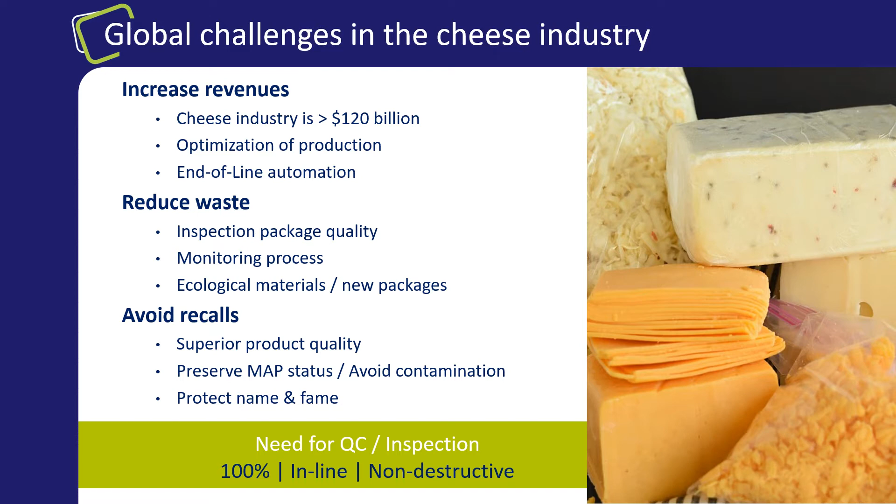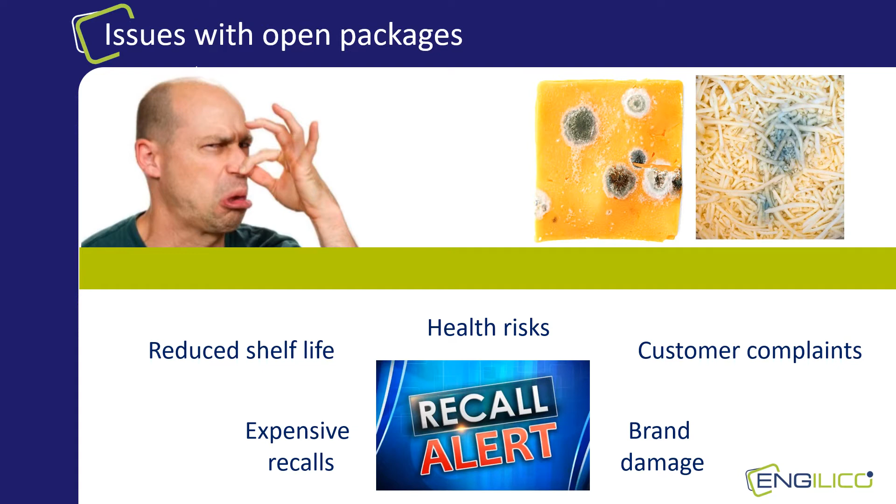When sealing flexible packages, there are different issues that can cause open or leaking packages. The first type of issue that results in open packages is residual product or material that is stuck in the sealing area. For example, as grated cheese is a greasy, sticky product, it often occurs that cheese particles are residing in the sealing area during the filling. Or in case of sliced cheese, the cheese rinds can also get stuck in the seal.

Other issues are folds, foldovers, or wrinkles in the seal that can lead to leaking packages. Also, misaligned cheese slices or trays on which the cheese is positioned can lead to seal height errors or product in seal. Above problems can be caused by the filling, positioning, or package forming process.

As there are many mechanical parts in a packaging line, there can be drift on the packaging and sealing process that can lead to above-mentioned problems. Also, dirty sealing bars or Teflons can be the cause of badly sealed packages. Or, if the overall process is packaging too fast, there might be issues as well.

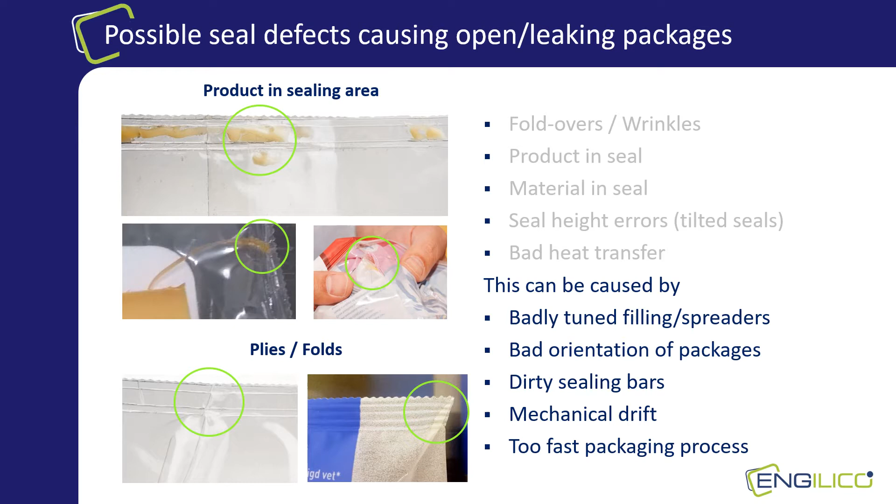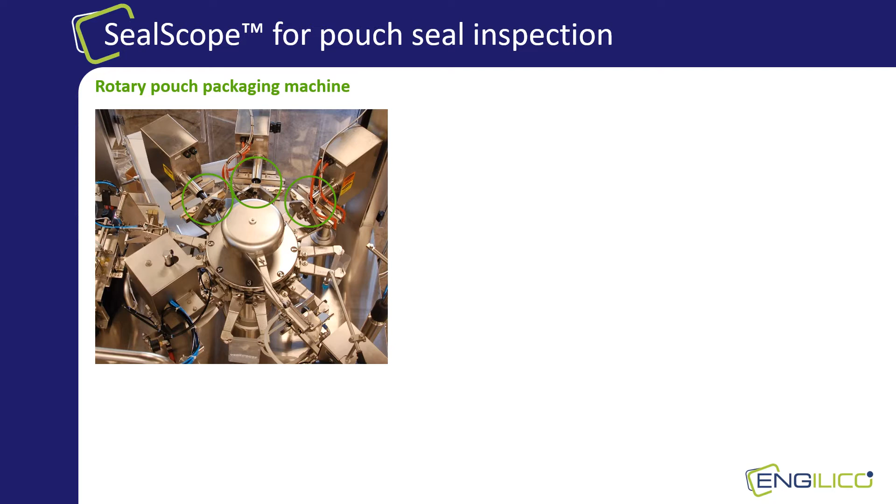The SealScope technology is explained on a rotary pouch machine, but is basically the same for other types of machines. The SealScope system consists of one or more sensors that are attached to the sealing bars of the packaging machine and a controller unit with the SealScope software. Of course, the sensors are specifically designed for food applications and are IP68 washdown proof.

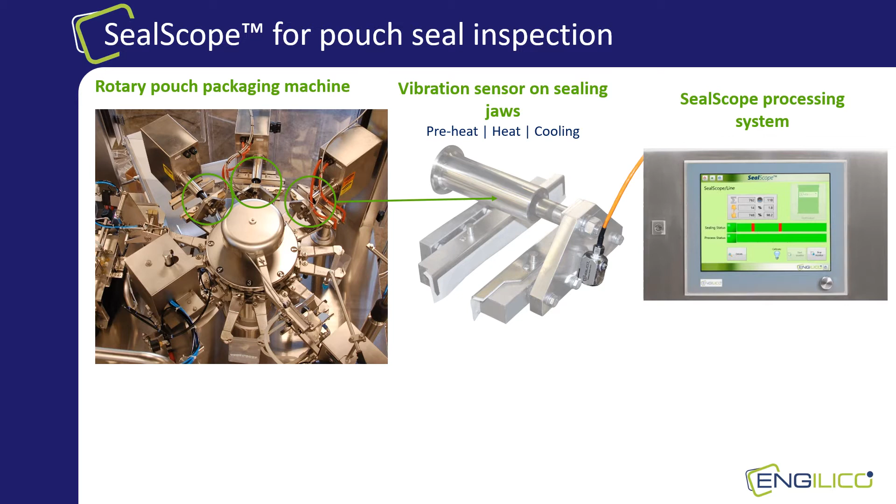The controller processes the sensor signals, but also receives and sends signals from and to the packaging machine or peripherals such as an ejecting mechanism. As the sensors are integrated within the machine, every individual package is inspected in the packaging line in a non-destructive way. This is why the system is called an inline 100% seal inspection system. Also, because the system is integrated in the machine, it will not require any additional space nor any change to your existing packaging line layout.

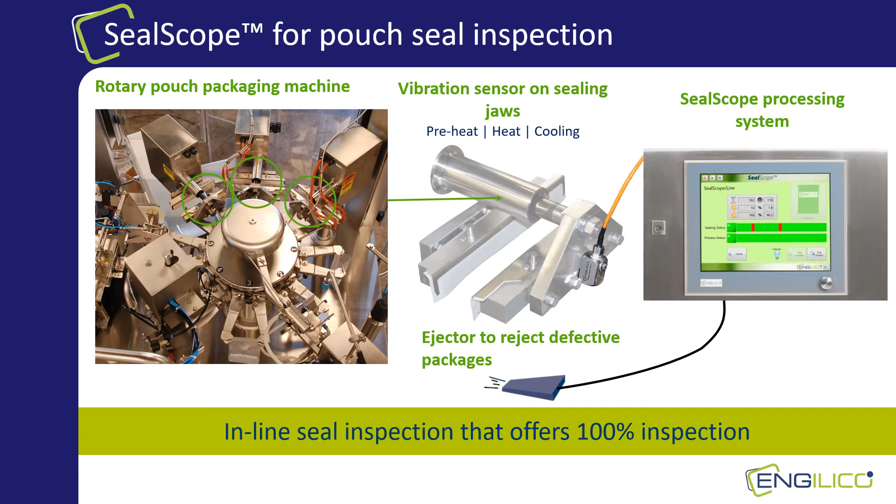Every measurement is compared to a reference profile of a good seal, a so-called fingerprint. The reference models are automatically updated at the start of every run using correct seal profiles, a process that we call baselining. SealScope can use different reference models to accommodate changes in thickness, material, weight, or size, as the product on the line also can vary. If a sealing measurement differs too much from user-defined boundaries around the reference profile, a signal can be sent to an ejector to exclude the bad package.

As every seal is measured, it is also possible to monitor the variance on the sealing process in time. Alarms can be issued when exceeding user-defined thresholds, and cleaning or even maintenance can then be scheduled.

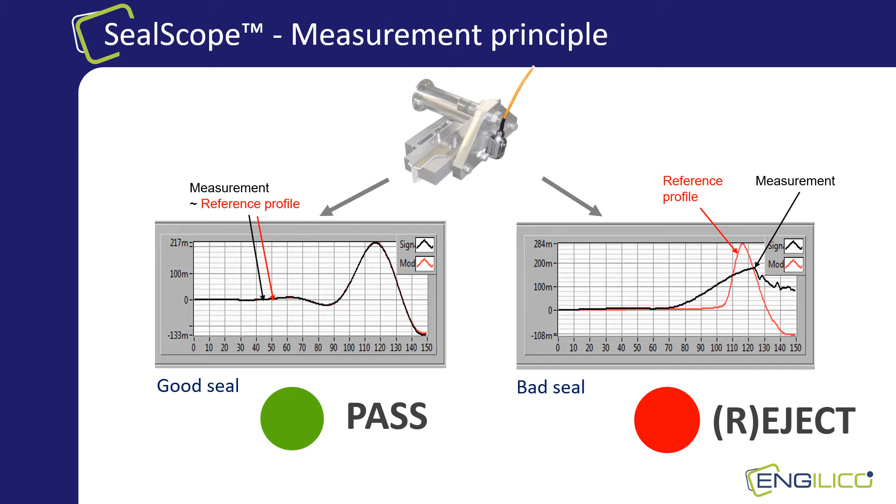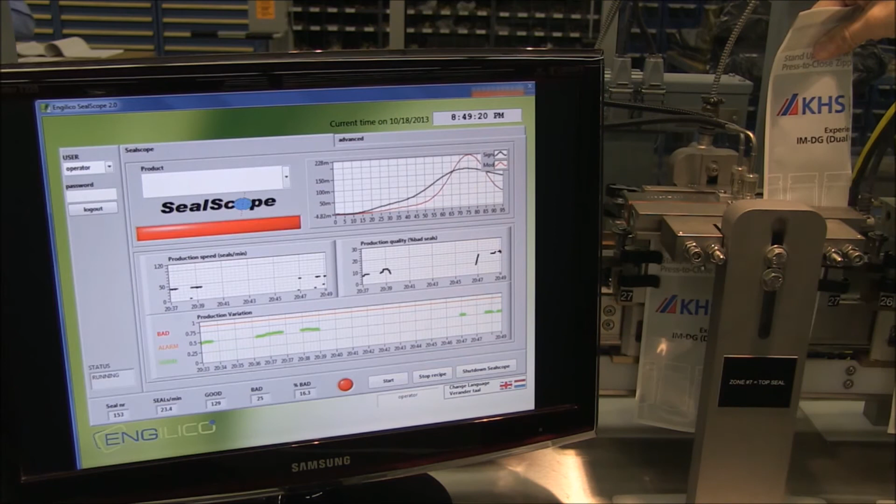So here is an example of how SealScope works on a pouch packaging machine. Pieces of packaging material with different sizes are inserted during the sealing of pouches to simulate wrinkles or product in seal. One can clearly see the differences in measured signal and how SealScope reports the error. It also demonstrates that SealScope is very sensitive and can pick up small contaminations or wrinkles.

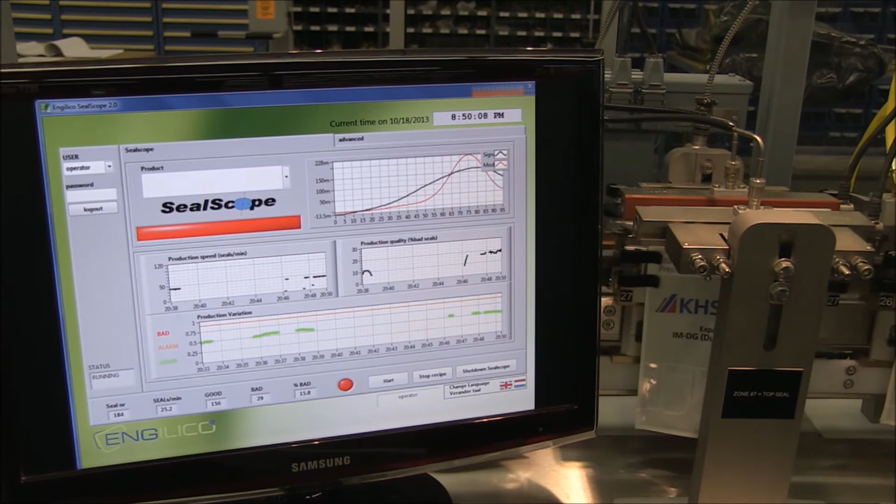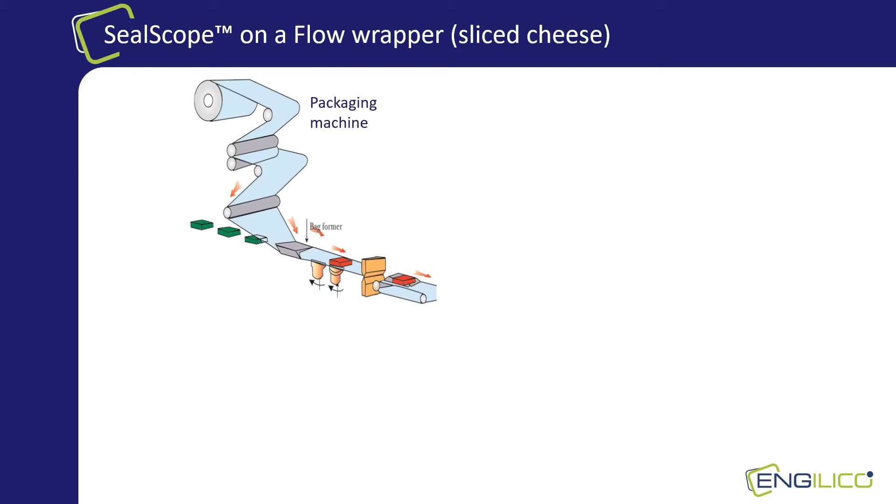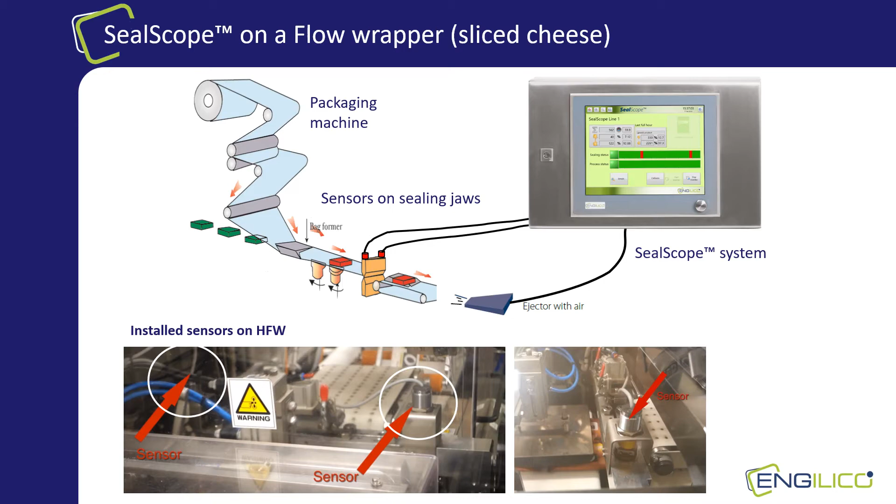The second example is an integration on a horizontal flow wrapping machine to package sliced cheese. The distance sensors are connected with brackets to the sealing bars. In the next movie, the operation is explained. First, you see how the packages are sealed and separated. The arrows indicate where the sensors are located.

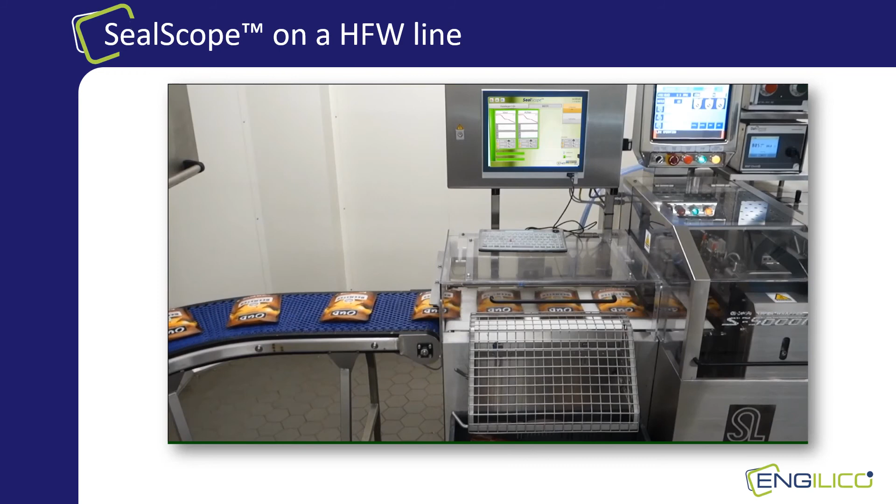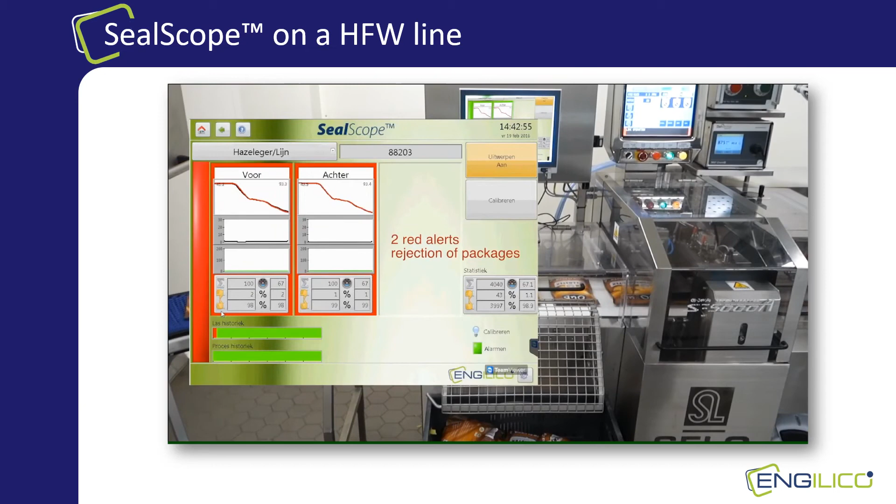For defective packages, red alerts are shown in the SealScope software. The packages with issues are blown out by the ejector. These packages can be manually verified to identify the issue, which can provide important information to fine-tune the packaging process. Another advantage of the inline detection is that the product can be repackaged immediately.

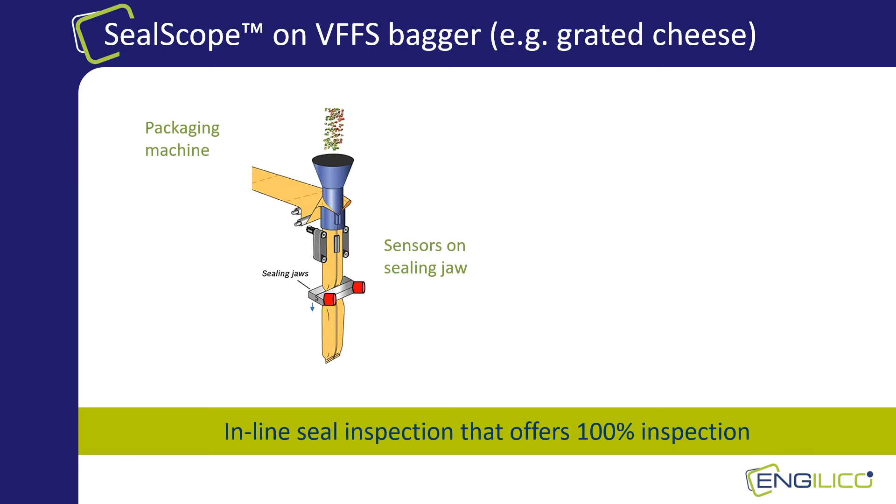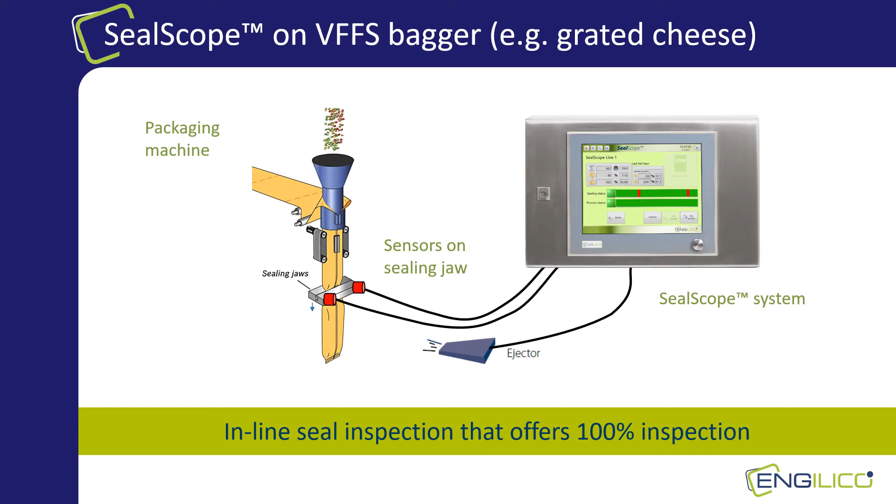The last example illustrates the operation on a vertical form-fill-seal bagger, often used for packaging grated cheese. Distance or vibration sensors are mounted on the sealing bars to detect product in seal or wrinkles. In the next demonstration movie on a VFFS machine, it again shows the basic operation of SealScope for 100% inline inspection.

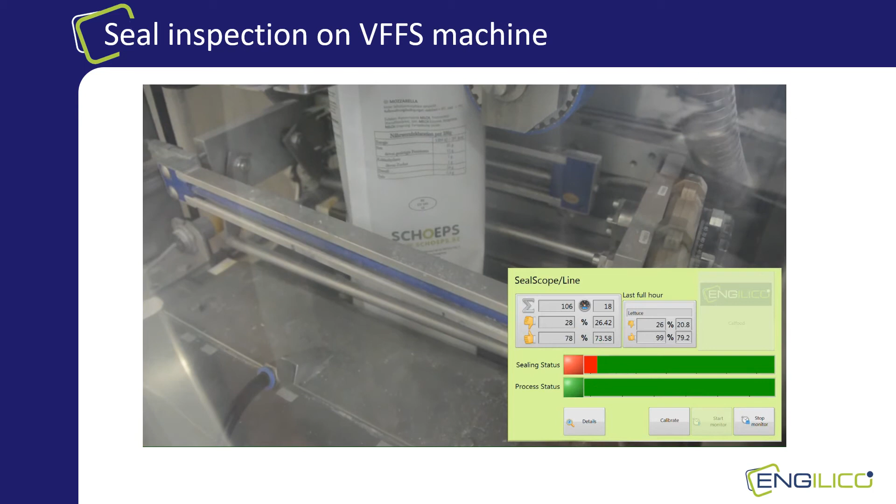In this demonstration, grated cheese is packaged on a VFFS machine. You can see again the sensors, and SealScope detects issues with product in seal or faults that lead to micro leaks.

The integration of the sensors is relatively simple. Vibration sensors are mounted on the sealing jaws using a standard M6 bolt. The distance sensors and targets are mounted using a mechanical bracket that is interfaced to the sealing bars or holders. SealScope operates both with single and multiple sealing packaging machines such as duplex, triplex or quadruplex sealing stations.

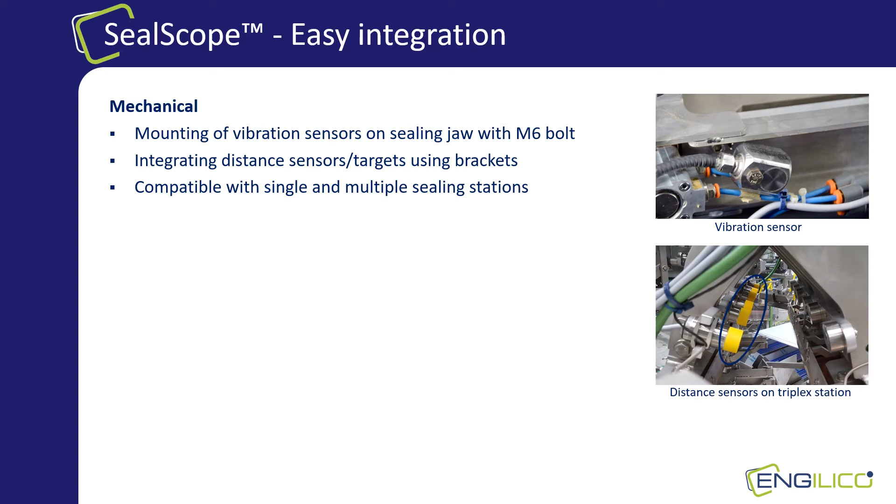The base controller unit with touchscreen operation handles PLC-type digital 24-volt signals from and to the packaging machine and peripherals. The input signals consist of triggers from the machine cycle indexer or signals that indicate the opening and closing of the sealing bars. The output signals consist of triggers sent to an ejector system to remove the faulty packages.

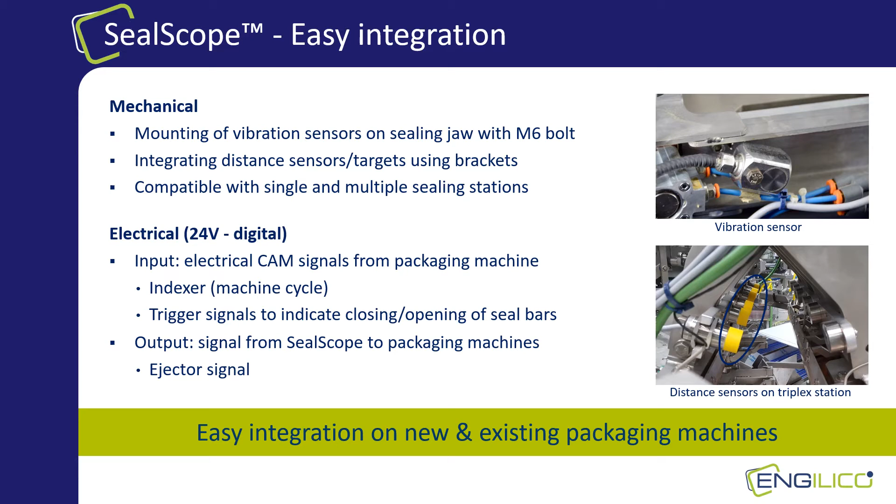Typically, the installation of a SealScope system, including mechanical and electrical wiring, testing and fine-tuning of all parameter settings, is limited to a few days. As the integration is relatively straightforward, SealScope is compatible with almost all packaging machines for flexible packages. Some of the renowned brands on which we have already successfully integrated are presented in this slide.

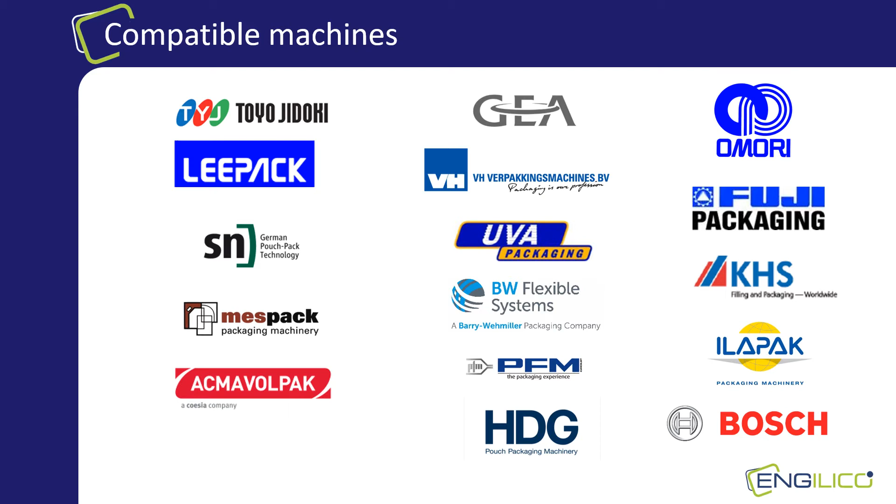So let's now take a closer look at the operator software. The operator software runs on the controller unit that is embedded in an industrial cabinet equipped with a touchscreen. The main screen is very operator friendly and provides basic information on individual seals and the sealing process status.

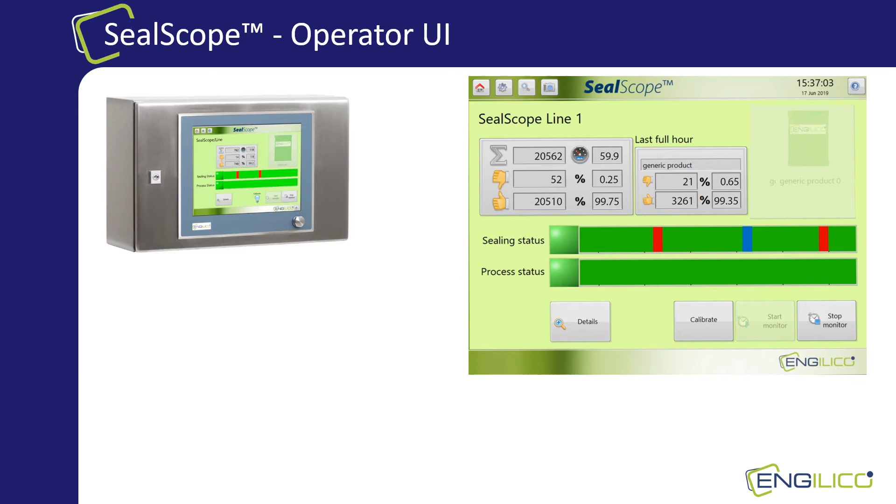In the sealing status, the operator can see the quality of each individual seal. A defective seal is indicated with a red bar. Also, if there is an empty package due to a wrong filling, this is indicated but with a blue bar. In the process status, one can see the variation of the process over time. Information is available since the start of the production run and on the last hour. The operator can also launch a calibration phase to set the reference profile after a standstill or after cleaning.

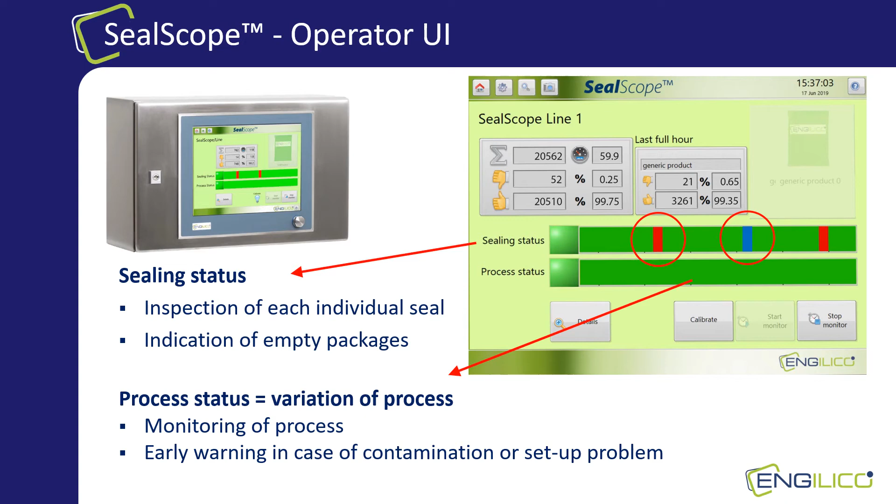Behind the basic functional operator UI, there are more advanced UI screens to analyze detailed results. In the advanced UI screens, all measurement results and signals from the different sensors are displayed to provide more information on the sealing process. All seal bar closing information, such as lift, tilt, and optionally roll, is calculated and is presented in a visual way to obtain more information on the seal bar behavior.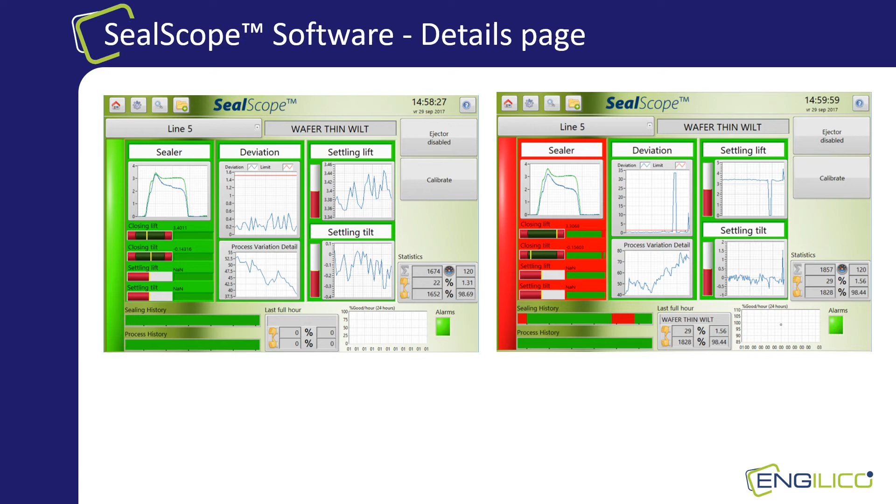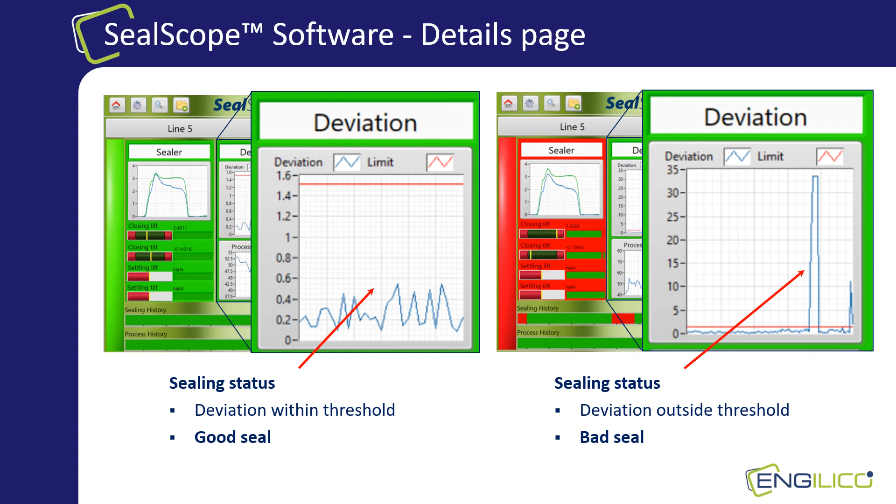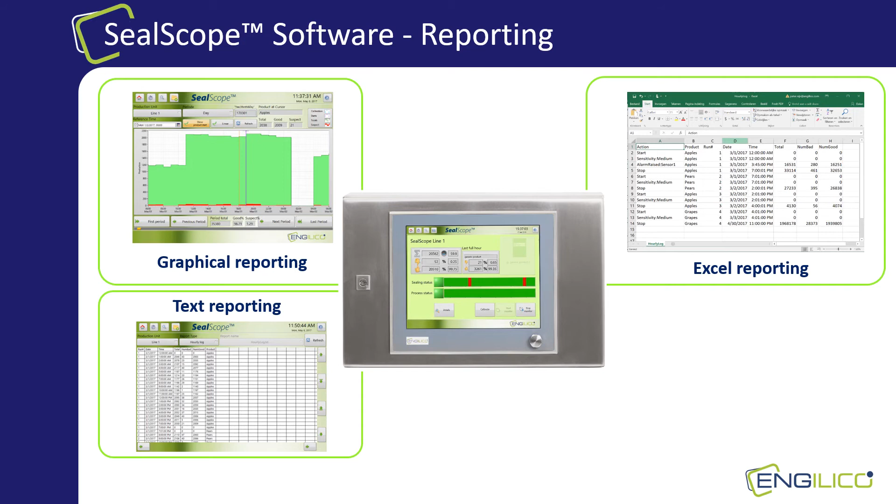This can assist the operator to fine-tune the sealing process or to analyze what might be a cause for incorrect seals. As you can see in the deviation detail window on the right, the measurement signal crosses the threshold and so the package is rejected. In the reporting module, all measured results can be displayed either in graphical or text-based reports. Various reports are available that are geared towards different audiences such as operators, quality responsibles, production managers, or general management.

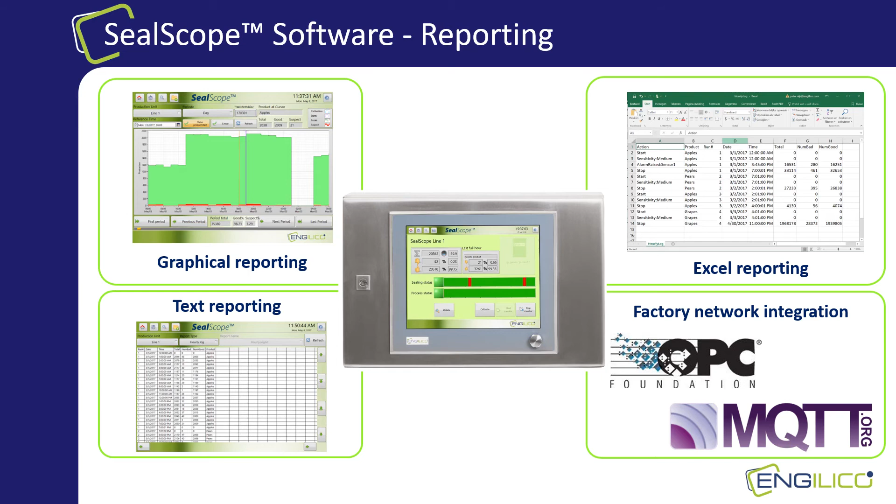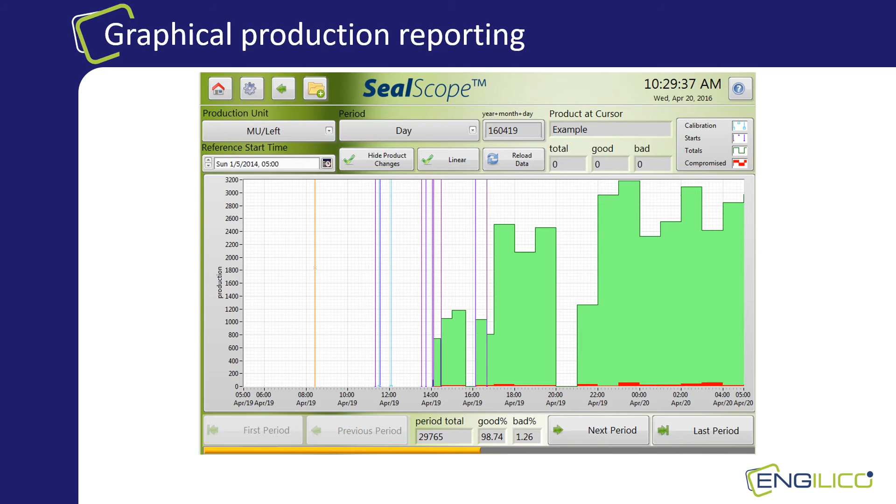Today, producers want to learn more from daily digital manufacturing data to optimize their production, to predict maintenance cycles, and even to adjust machine parameters automatically. With the recording of all sealing process data, SealScope complies with this so-called Industry 4.0 philosophy. All measurement data can be saved on the company network or streamed via OPC MQTT connectors. This allows big data analysis to monitor the line performance. As an example of reporting, SealScope logs hourly production data to visually compare performance over various operators, products, and packaging lines.

SealScope logs date, time, total packages, number of good/bad packages per product type, and this data is available in a text format for offline statistical analysis. Also, operator interactions with SealScope are logged to obtain 100% traceability.

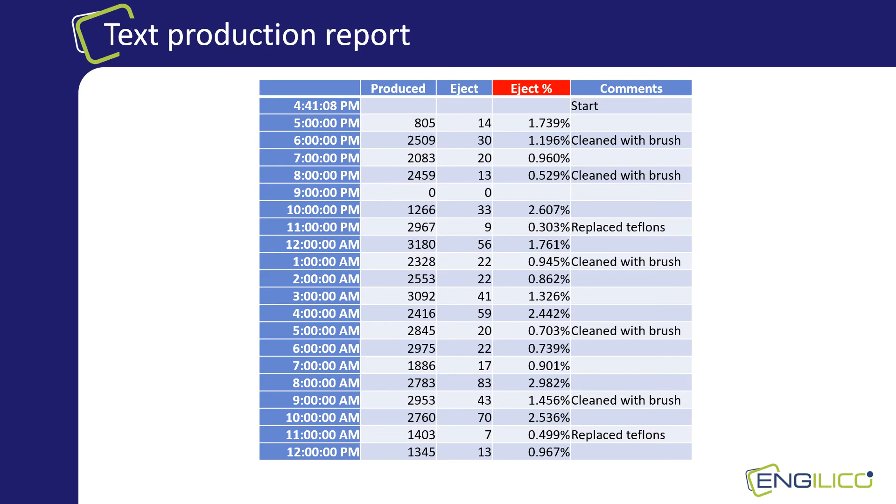So let's look at a few customer examples now. The first example is Hazeleger Kaas, a Dutch co-packer of sliced cheese. Here SealScope is integrated on two Omori flow wrappers. One of the main goals was to monitor the sealing quality when introducing a new type of fold-over packaging. SealScope was crucial to fine-tune the packaging machine to obtain the best packaging speed with optimal quality.

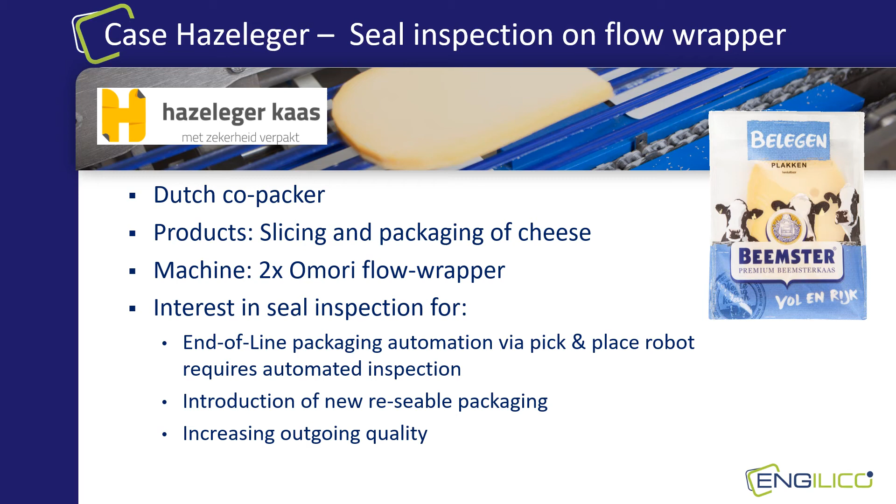Also, automated inspection was an important element in the process as the end-of-line packaging was automated and no manual inspection was desired. Here also the main issue of bad seals are wrinkles, product in seal, or foreign materials such as the cardboard in the seal.

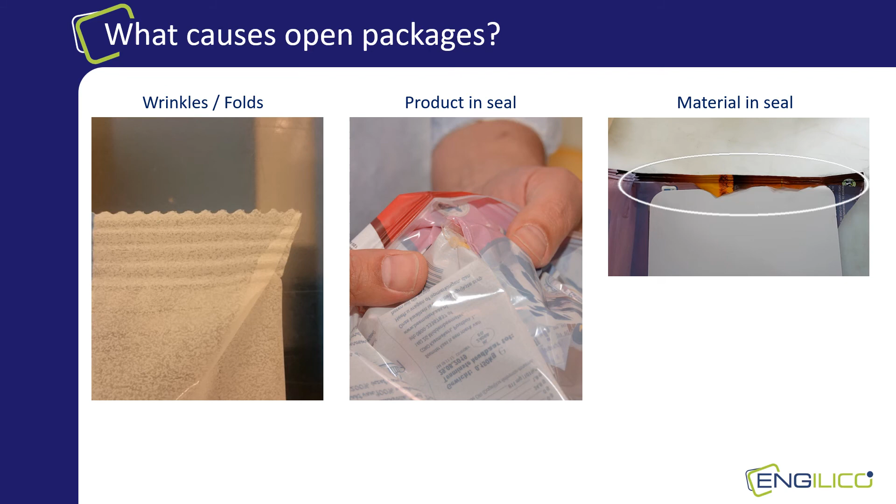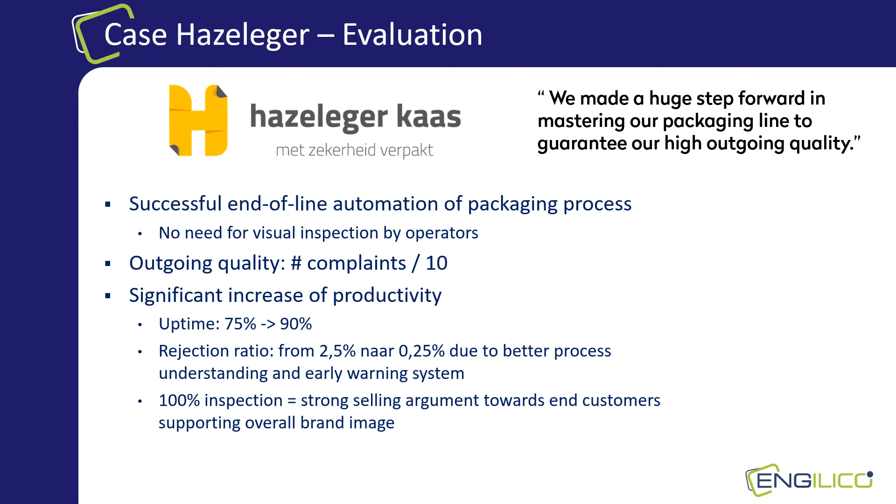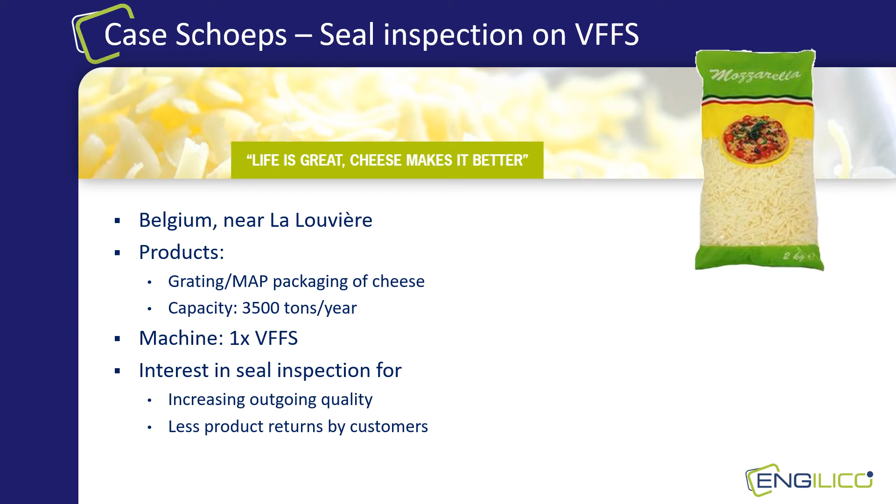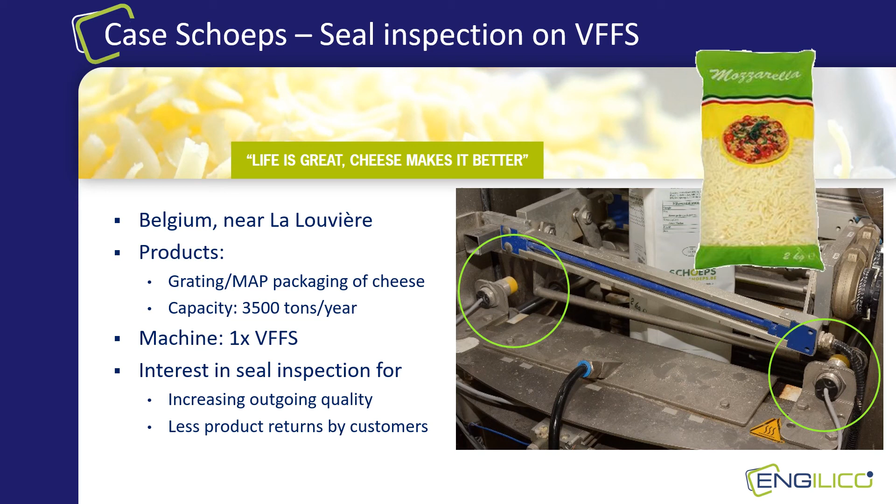Another customer example is Schoeps, a Belgian grated cheese producer situated in La Louvière. In 2018, they searched a solution to improve their outgoing product quality as they had a considerable amount of product returns. They had issues with micro leaks in the seals, mainly through wrinkles, folds, and faults in the seal. SealScope sensors were implemented in the sealing bars of the vertical form fill and seal packaging machine, with remarkable results.

After installing SealScope, the customer complaints on bad packages drastically reduced. Before the system was installed, about 1% of the total outgoing 3,500 ton production was returned by the customers. This now dropped to a few packages per month, which is a remarkable result.

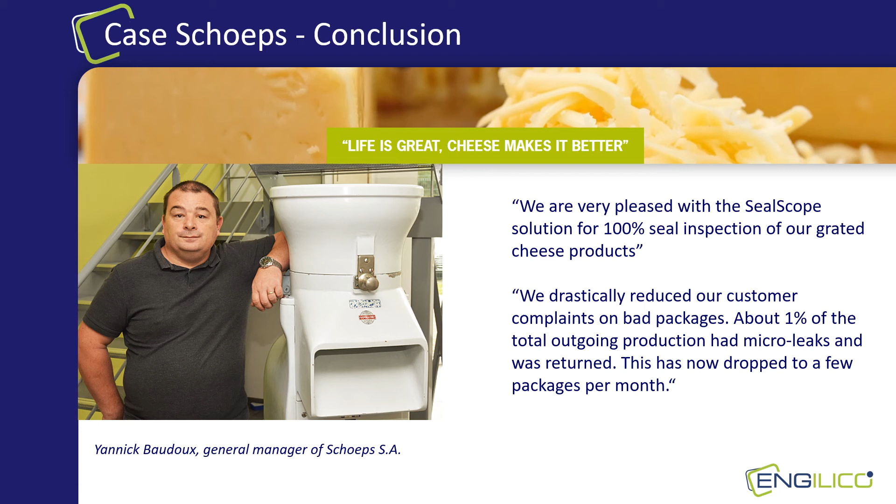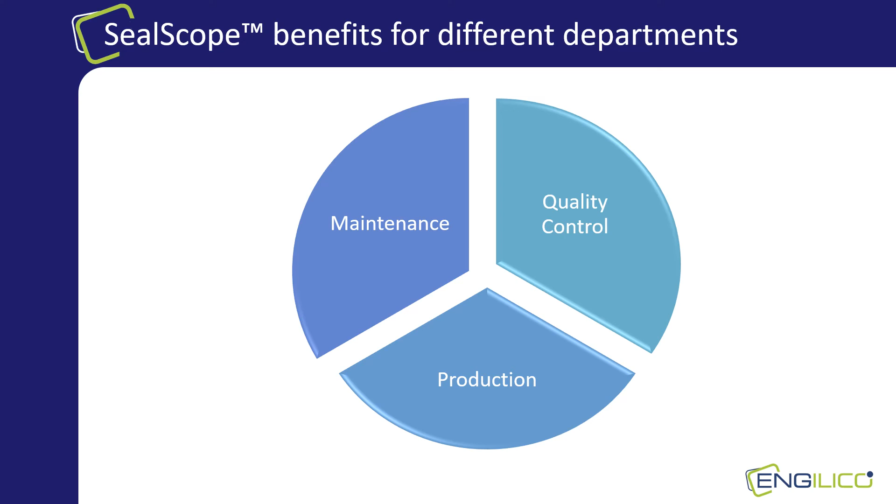So let's take a look now at the global benefits that SealScope brings for different departments in the company. SealScope provides benefits towards three important stakeholders: the quality control department, production, and the maintenance department. For the quality department, SealScope enables to obtain a higher quality by reducing the number of defective packages that leave the factory. The inline 100% inspection of all packages avoids the manual inspection at the line. And also, if sample-based testing is done, it avoids to sort or quarantine the production output after a bad sample is detected.

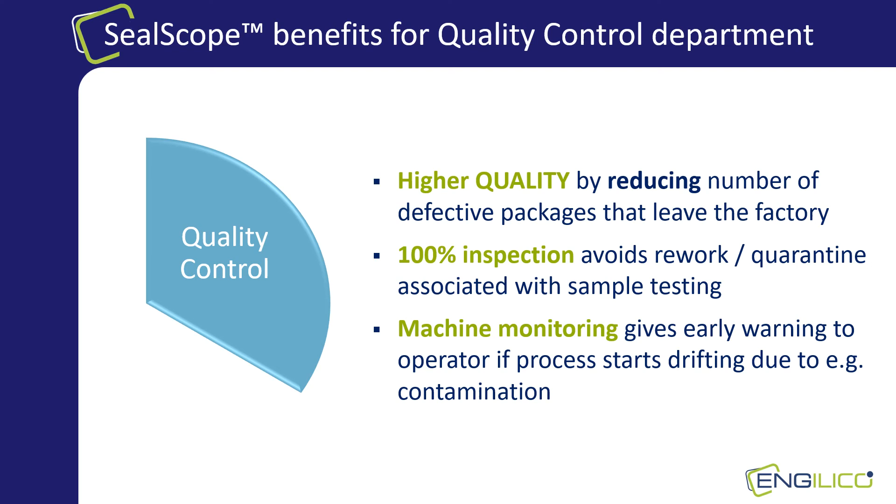The machine monitoring functions give early warnings to the operators if the process starts drifting due to, for example, contamination or dirty sealing bars. For the production department, SealScope enables a higher productivity by maximizing the packaging speed while maintaining the quality. Typical productivity increase values vary between 5 and 20%. It is also possible to streamline the overall production process by comparing measurement results across all machines and operators. And also the packaging machine can be fine-tuned by analyzing the rejected packages in the ejector bin.

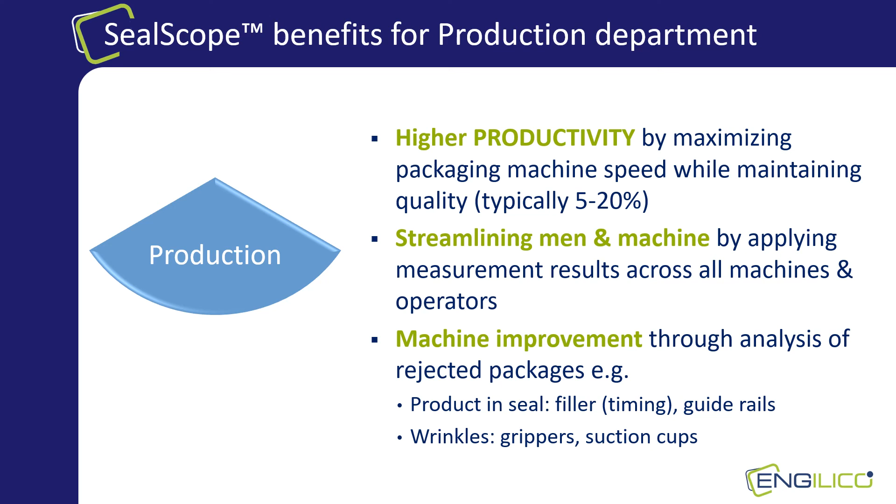This inspection quickly provides the operator with the main current problems that can be product in seal caused by a badly timed filler, or wrinkles that can be caused by the gripper or the suction cups that are not optimally configured. Also for the maintenance department, the benefits are clear. By monitoring the packaging machine, early warnings can reveal seal bar or alignment issues that are induced by dirt, wear or drift. Another example is a better setup of duplex seal bars by using measurements to align the closure of the seal bars.

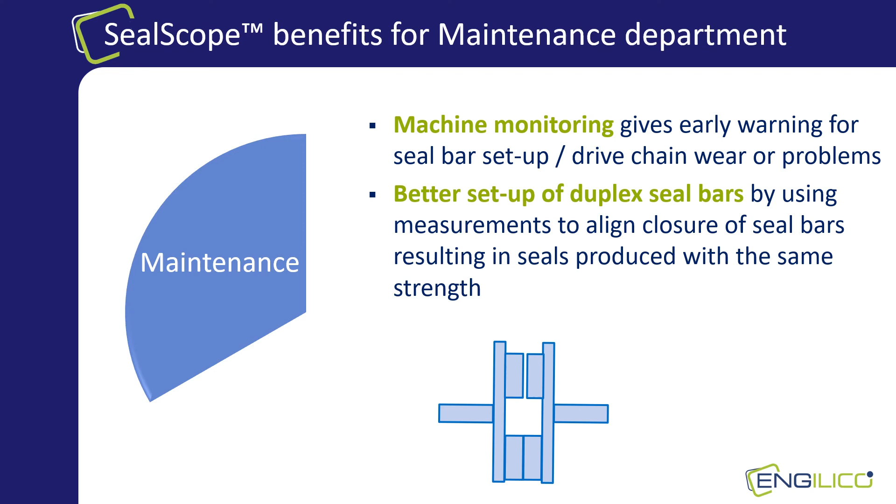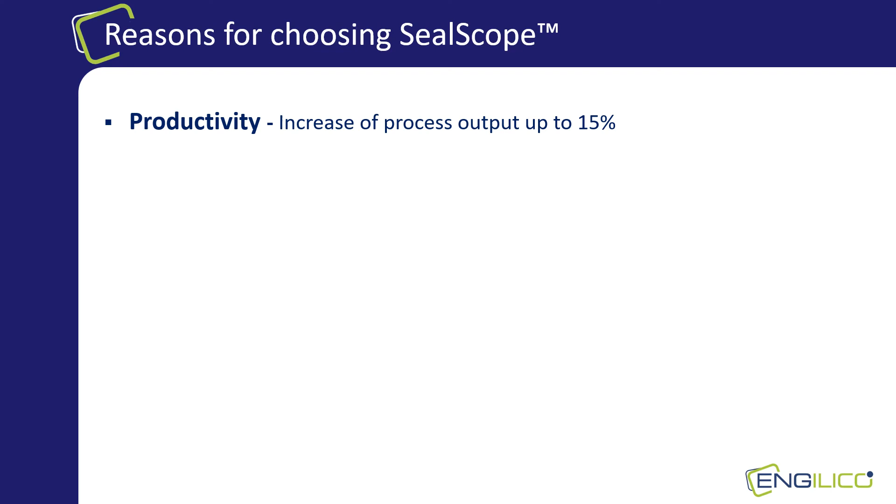These numerous advantages have resulted in 150 plus installations at renowned customers, mainly in food and pet care, but particularly also at cheese producers. The reasons why these customers choose SealScope are again summarized in our final slide. In about all of our projects, productivity increases are noted up to 15%. A better quality is realized. As SealScope eliminates defective packages, the number of compromised outgoing packages drops significantly.

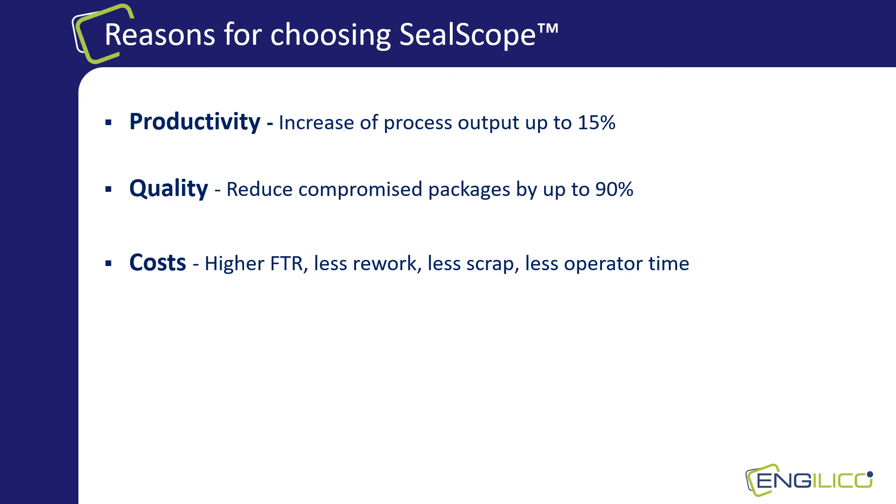The higher first-time right ratio results in less rework and lower scrap, less operator waste time, all contributing to lower costs. For operators, they can expand their tasks to contribute more to the process management. And the monitoring tools of SealScope provide better and faster insight in optimal process settings and line behavior.